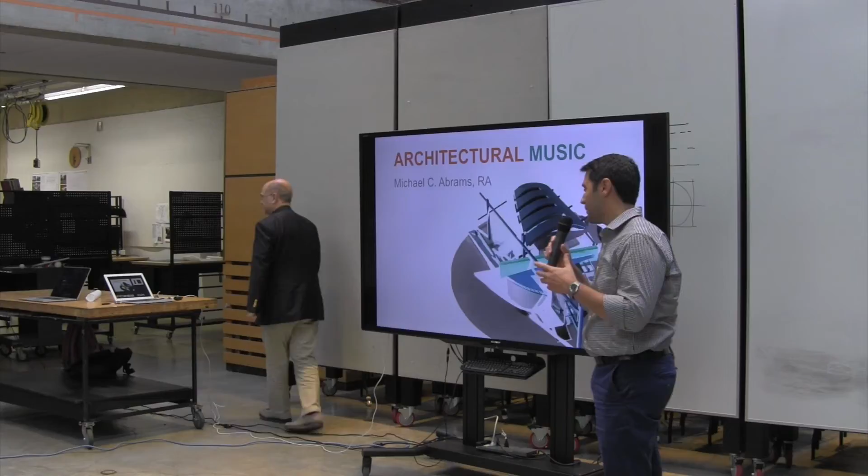I teach Architecture 400. I'm going to give you today's PowerPoint presentation, mostly on my design process, how I design, and how I relate a lot of my architecture to music. I love music, I like to play music, and I found both have their own language - one is auditive, and the other is visual, the architectural one.

One thing I always like to do is look at the similarities between architecture and music. It all started when I was an undergrad at the University of Puerto Rico. My teacher gave me a project that was to be the place for your hobby. So what I decided to do is create a space in which to play guitar, which is the instrument I play, and the concept was to reinterpret the components that create the guitar.

So I started looking at poetry and philosophers, and I found this great quote by Goethe that talks about petrified music - I call architecture petrified music. Really, there's something in this, the tone of mind. And this whole quote got me thinking about how I can start to relate architecture and music.

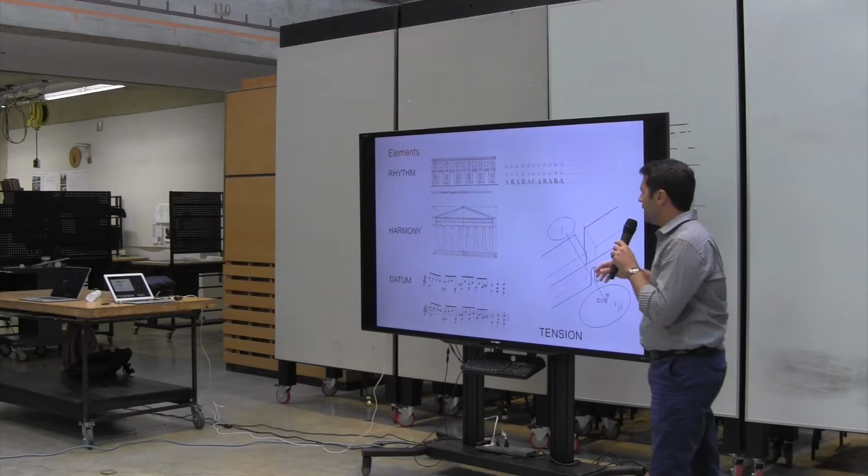I looked at some elements that are very similar, like rhythm, harmony, datum, tension, and with those four basic elements I could start seeing how to relate and make something intangible become tangible in architecture. So I created this series of diagrams, kind of what my students are doing right now in 400, looking at rhythm, tension, datum, and that helped me create this pavilion - this guitar pavilion.

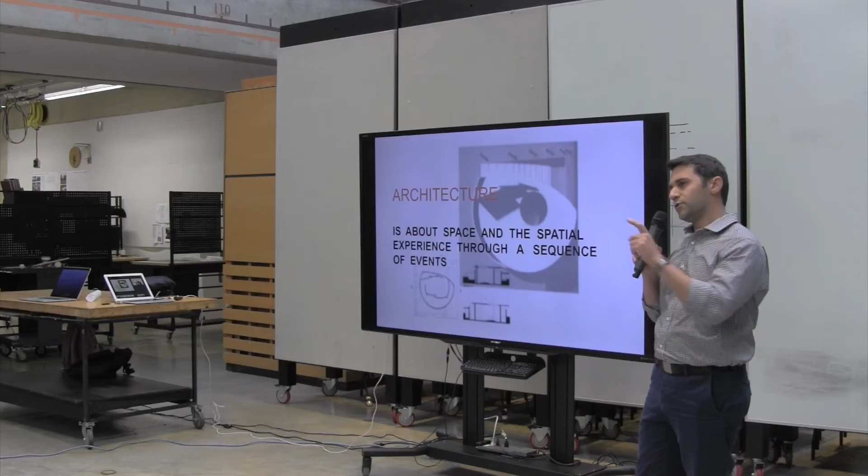That became an important lesson because it helped me understand what architecture is and how I define it for myself. To this day, architecture is about space and the spatial experience through a sequence of events. So this project, the whole process of looking into music, understanding it, making something intangible tangible, helped me reach this description that I still use today.

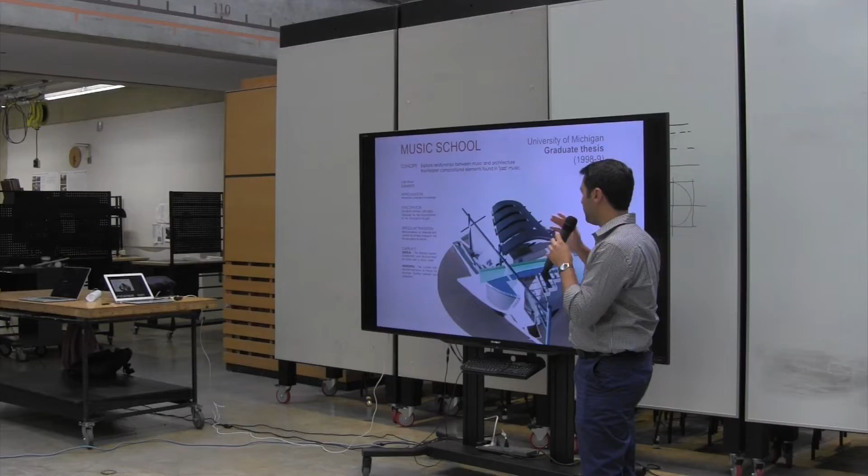I was able to experiment even further at the University of Michigan when I did my graduate thesis back in 1998, 1999. I started looking at other elements, in particular jazz music. Jazz is a bit different than regular music - it has more improvisation and offbeat rhythm, syncopation. So I was able to explore a bit more into other realms of music and then incorporate them into architecture. Here's a few more diagrams I did for that particular project.

This is a music school in which I incorporated this offbeat rhythm into the main auditorium and the classrooms, so it's all based around the theme and the work of music. Now, it's only two slides, but it took a whole year to work on this, and it's one of my favorite projects ever.

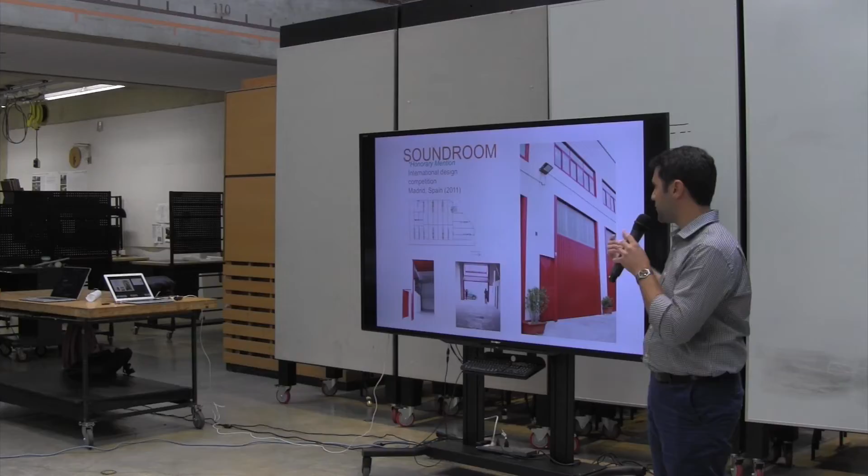Now, in real life, in practice, I was able to incorporate that as well in this competition called the Soundroom. This is in Madrid, Spain, in 2011. They wanted to hire an architect to design a space for young musicians in Madrid to play their instruments. Right now they're renting all these storage spaces, so they wanted to create a soundproof space. So I started looking at wavelength.

How do you take a simple wavelength that doesn't have a dimension, only one dimension, and transform that into a habitable space, in which eventually will become the rehearsal spaces. I also went back to that first project when I was in Puerto Rico to look at elements of rhythm, datum, tension, to help me incorporate everything I've learned so far into this piece of work.

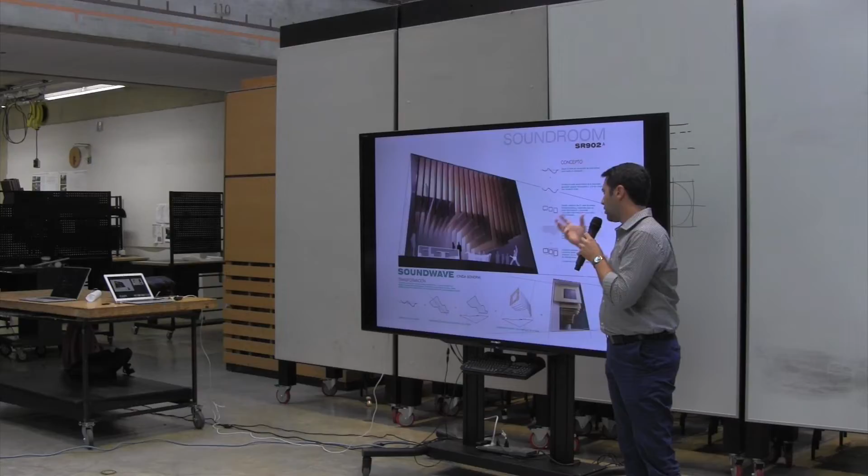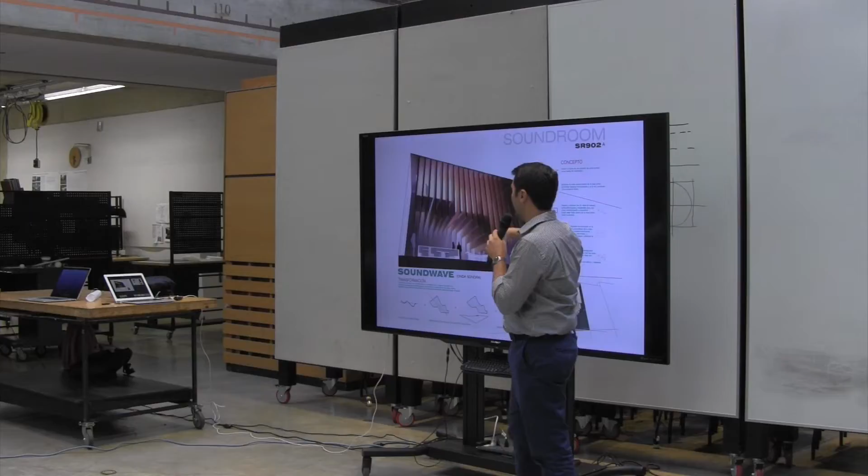This type of project was an enclosed element or shell, so we could only work the interior out. So I decided to take this habitable sound wave and create it with wood panels, the structural system that will support the three rehearsal spaces. That allowed an interplay of light throughout the day, so the rhythm of light was shown from morning to noon - so you can reflect music through light, and that's one of the things I really enjoyed about this particular project.

It got honorary mention, didn't go all the way, but I was very proud of it. We had to do a budget regarding the acoustics and the paneling system. It was truly a labor of love.

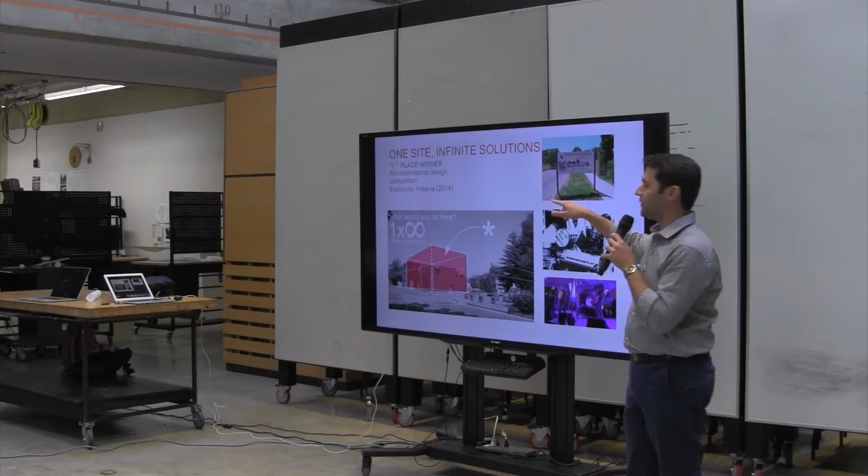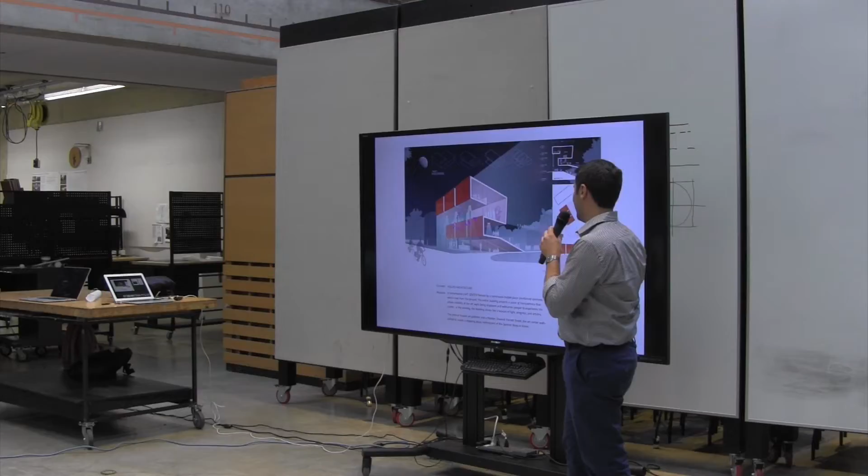Then 2 years ago, I did another one called One Site Infinite Solutions in Evansville, Indiana. For this one, I actually won, so I was very happy. It was this site in a rough neighborhood in Evansville, and they wanted a space for young musicians to play and artists to collaborate. So I created this art center, expressed as a folded piece of architecture that grows from the ground, like ashes, like the phoenix. At night, I based it heavily on the Spanish Steps in Rome, so you could still use it at night when the building was closed.

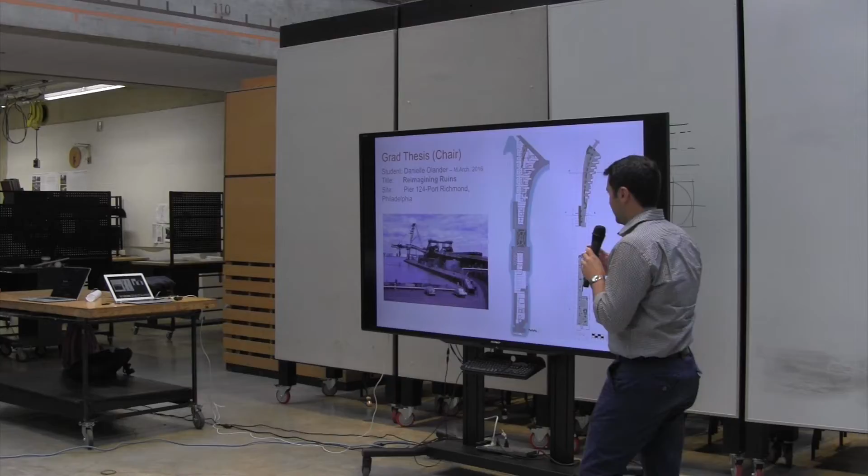Last year, I had the honor to be the chair for 2 students. One of them was Danielle Olander. I wanted to show the work we did together in that thesis. She looked at a pier in Port Richmond, Philadelphia, and here are the final plans. She took an abandoned building, and she and I were able to collaborate greatly, because this shared relationship almost becomes like a parent - you feel for them, you suffer for them, you almost cry for them, but you enjoy the moment. She took this really rundown building and turned it into something positive and beautiful for the community of Richmond - a civic community center for artists and young artists to come and play. So, thank you so much.

Michael, I forgot that you were a musician, and I just want to know if the PechaKucha song is up to scratch for you. Sure. Okay, next year.

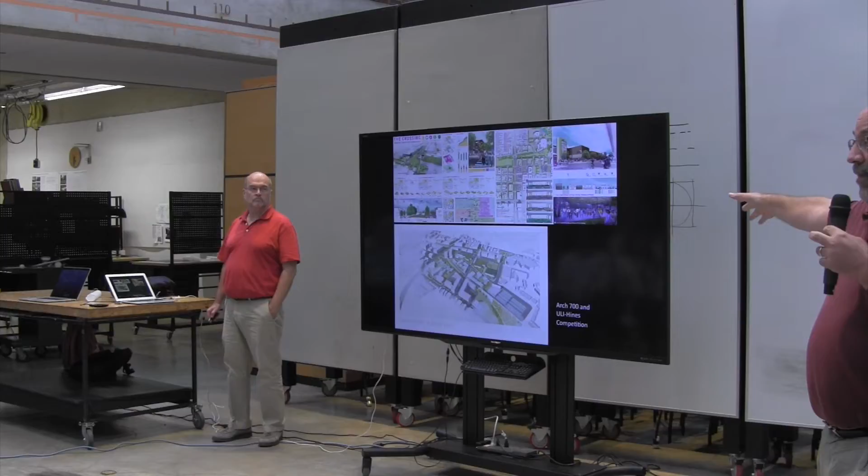This is Frederick, Maryland, in and around the area. You folks have an enormous amount of energy and insight and passion, and the thinking you bring to these kinds of projects is extraordinary. The people in Frederick were blown away by what our students came up with, and it gave them a way of looking at their city that they couldn't easily get themselves. It's an outsider's view, but a very sophisticated view. Even if they don't implement everything we came up with, just the way of seeing it was extraordinarily important to them. So if you can have that kind of experience while you're here at Maryland, you should try and do so.

These are some of the images. This is a Philadelphia project we did. We got some nice prizes for this in studio, looking at the waterfront.

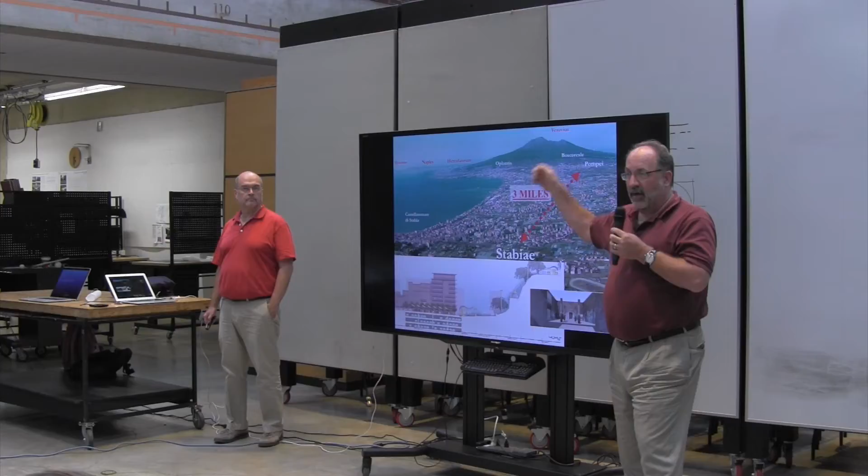This was all started, by the way, with a University of Maryland master's degree student. So millions of dollars of resources have been brought to bear to record, analyze, understand this site, and it all started with a master's degree thesis project, which sort of mushroomed into a great undertaking. The sort of things you guys do and are interested in can have incredible repercussions. This brought this site back to the world, because everybody had forgotten about it. It's the site right near Pompeii, the largest collection of Republican-era Roman villas in the world, and they're really fantastic to study and document.

Professionally, these are four people that I worked for and learned a lot from early in my career. Shalom Baranes, one of the best sort of businessmen architects you'll find.

Did a number of projects early in my career with Andrés Duany. Andrés Duany is one of the smartest people I have ever met, and anything he says about architecture and urban design, you really should think about, because he's very insightful. John Torti knows more about housing and running an architecture practice than anybody I've ever met. And Stan Eckstut, my partner with EEK, now Perkins Eastman, where I practice, is one of the most original thinkers in terms of urban design and architecture at the scale of the city.

A number of projects I've done early in my career: buildings with Shalom Baranes Associates, which were office buildings, and with John Torti, a big project in Turkey that was actually built, which was kind of amazing on this hillside. People in other parts of the world will put buildings in places Americans never would. This was all on 15% slopes and things, and it made for some tremendous sections in the buildings and in the urban fabric.

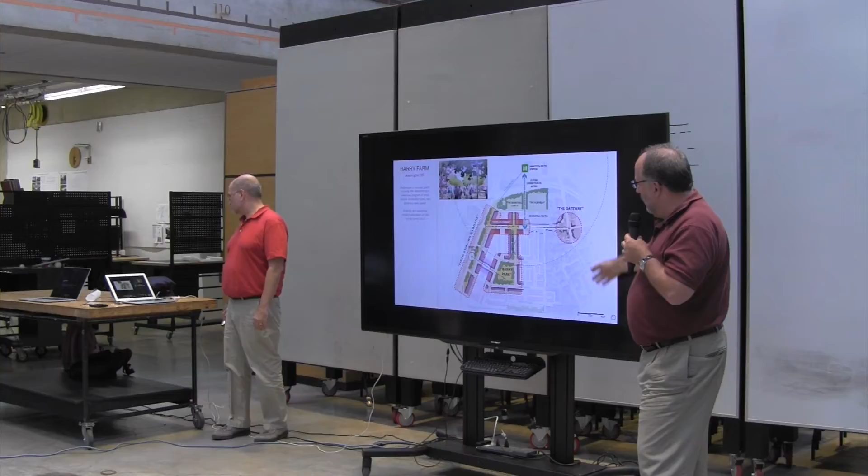Brookland Manor, a project on Rhode Island Avenue that will start construction next year. Barry Farm, another big urban design project in Southeast Washington. Some buildings I've done: a community center in Northeast Washington and Dunbar High School, and we make these kind of urban design drawings to show how the parts of the building relate to the context around them. It's really important when you get down to the scale of the building to show how it relates to the city. A project I've been working on for years, the McMillan Project on North Capitol Street, which will be rebuilding a historic landmark site that involves many different things.

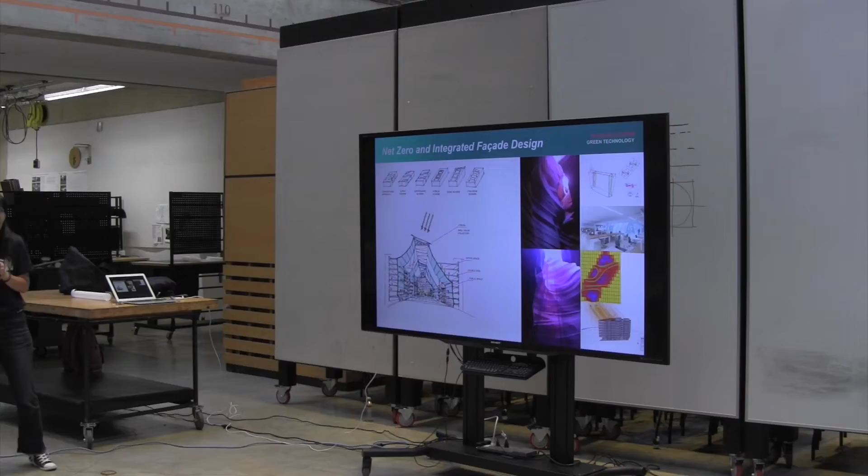Another interesting aspect of this building is the atrium design. The inspiration is from nature—see the Antelope Canyons, which not only have an amazing, fascinating form and texture, but also a fantastic daylight system. So we got inspiration from nature and tried to recreate that natural phenomenon in our building.

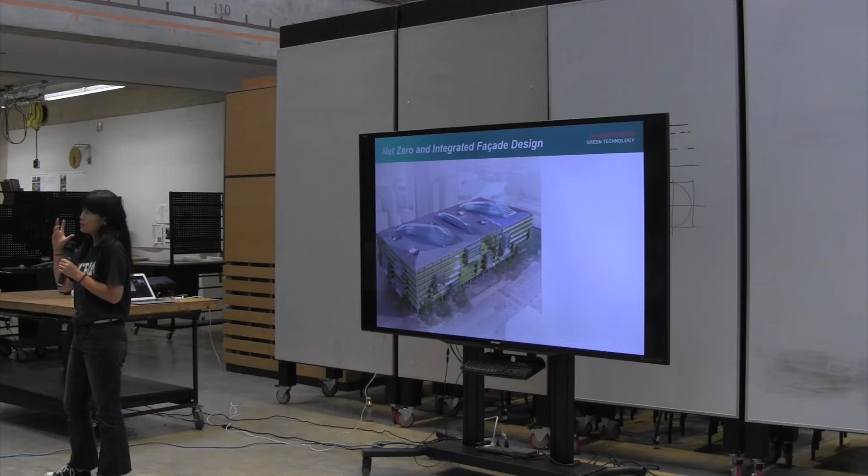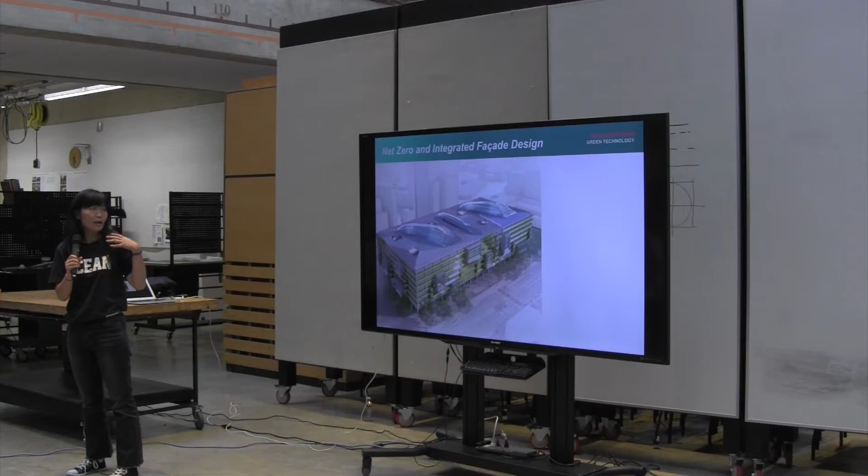Basically, by manipulating the geometry of the atrium, we tried to maximize daylight while at the same time minimizing solar heat gain. This is an overview—not a great picture, but it gives you a sense of the entire design proposal.

This project is located in a harsh climate, Abu Dhabi, and the client asked us to provide a fully glazed facade, which is not a great idea. So we used smart facade and smart glazing, which can provide self shade to itself.

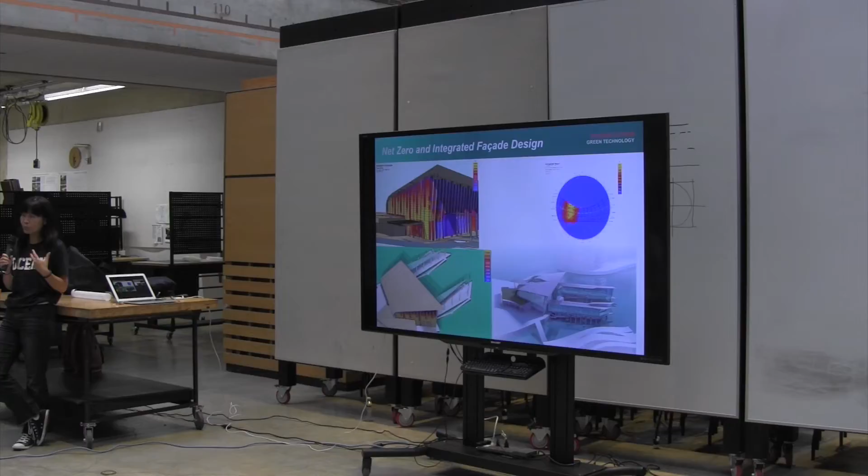This is another project in Doha, Qatar, another harsh climate. This time we took lessons learned from traditional, vernacular buildings. Instead of a glazed facade, we used natural local stone and focused on designing the best punch window.

We studied a lot of the geometry of the punch window as well as the material and different glazing types. Through simulation and iteration, we probably did 50 iterations in 3 days just to compare different design options. Here it shows the particular geometry of this punch window—it's not a regular punch window.

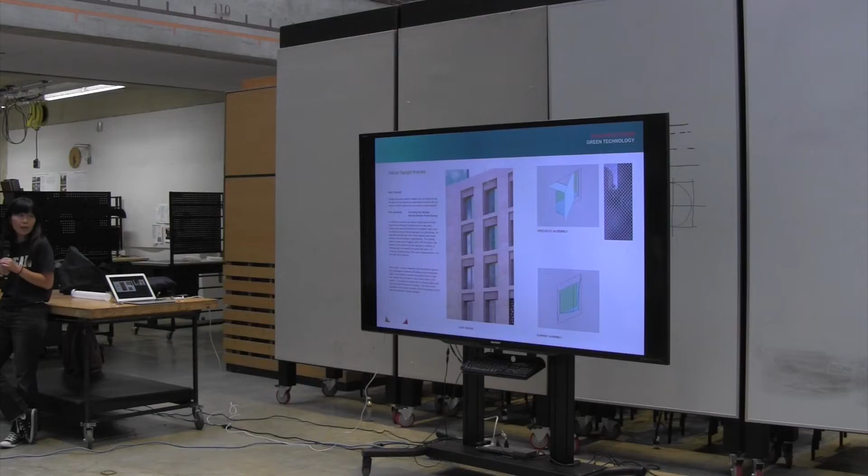We also did a lot of study on different frit patterns and techniques for how to integrate the frit inside the glazing. We do this almost like a second nature of the design process, from the conceptual design stage all the way to design development, basically comparing design options.

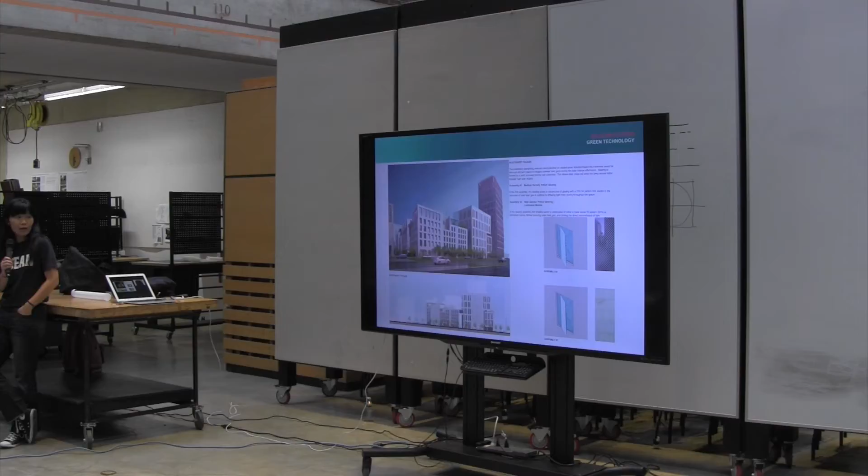I think green technology, meaning smart technology, can help you reach the optimized decision or design solution in a short period of time. Here it shows the different studies of the sun shade.

The last one is a particular area I've developed interest in over the past couple of years: life cycle analysis and adaptive reuse. For me, it's a natural progression because I'm always interested in quantitative, high-performance design and smart materials. That leads me to think about the entire life cycle of a building.

Not only how much energy the building will consume during the operational stage, but also how much energy the building will consume from day one—when raw materials are dug out from the ground—to the last day, when components are put back into the earth, to our planet. I believe that will be the future trend of architecture design and research. Not only do we focus on the building we live in right now, but also before and after.

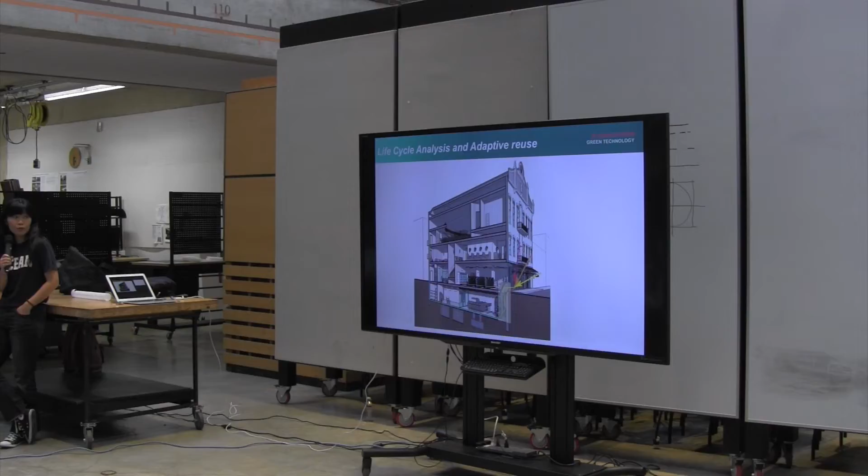This is a project my student did. They provided the adaptive reuse proposal, and at the same time I did the life cycle analysis of three different options.

Again, I think the future of architecture as a profession is going to expand beyond just design. As the former speaker said, we do a lot of design thinking as well, and we do quantitative research as well. Thank you.

I would have thought you probably had done many of these before—it sounded just like you had.

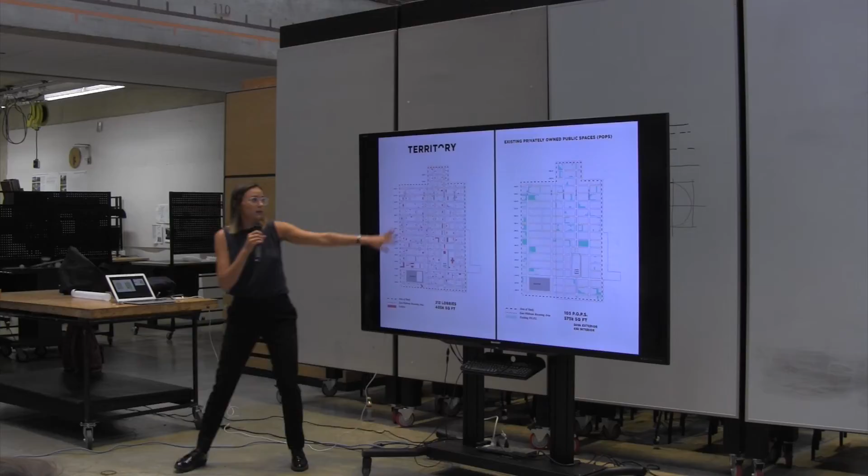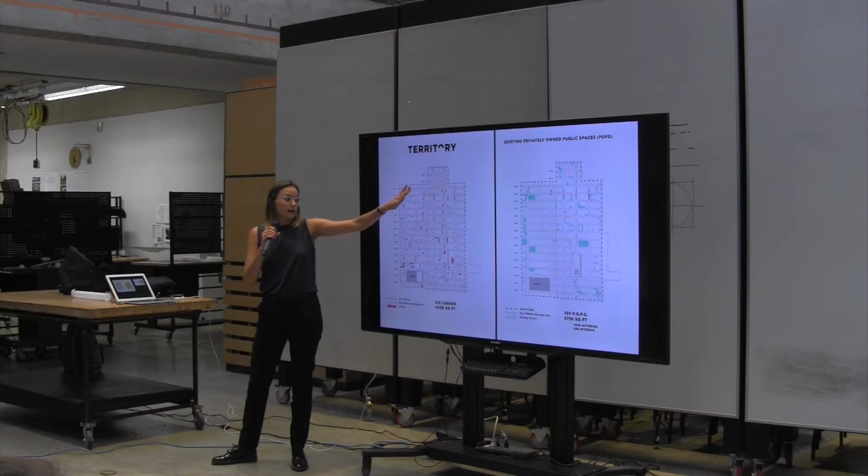I looked at East Midtown Manhattan, a downtown corporate area, and looked at all these totally empty, horribly used lobby spaces. I actually walked around and mapped them all out. This is the neighborhood—the city was looking at rezoning it anyway, so I had this momentum to work with. This shows how much of the city is on the ground floor, right next to the sidewalk, but blocked off and not used.

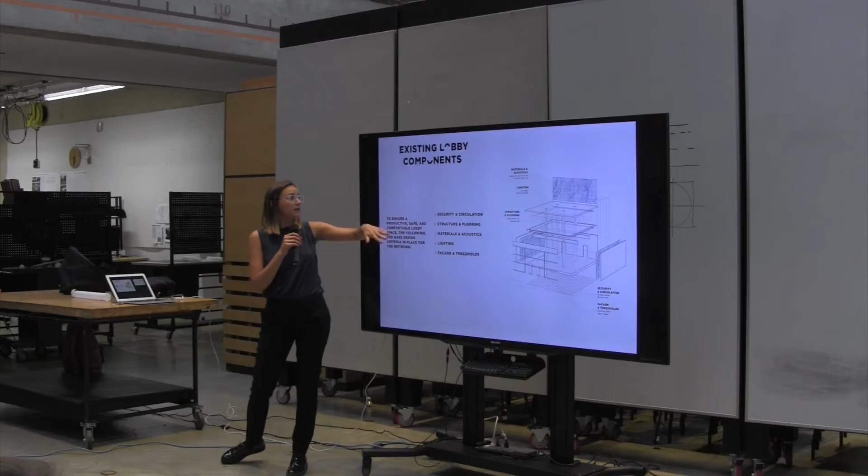The other map was a precedent of privately owned public spaces, looking at how the city is already knitting together public and private space—that's the big context. In the immediate context, this is the lobby. It's excessively designed in every way; the structure within the scale of the lobby is overly robust. Electricity, facade materials, all these things are already integrated in the lobby, and I looked at how architecture could rethink that with the materials that are there, intervening to make public space and a public network of lobbies through public-private partnerships, leveraging private interest in the city for public space.

This is an example I did in the Seagram building, looking at manipulating the facade, making mezzanines off the structure, and looking at how to consolidate circulation in this large space—not even the largest lobby in East Midtown—how the bottom of the Seagram building can really take that plaza that's there and bring it back in.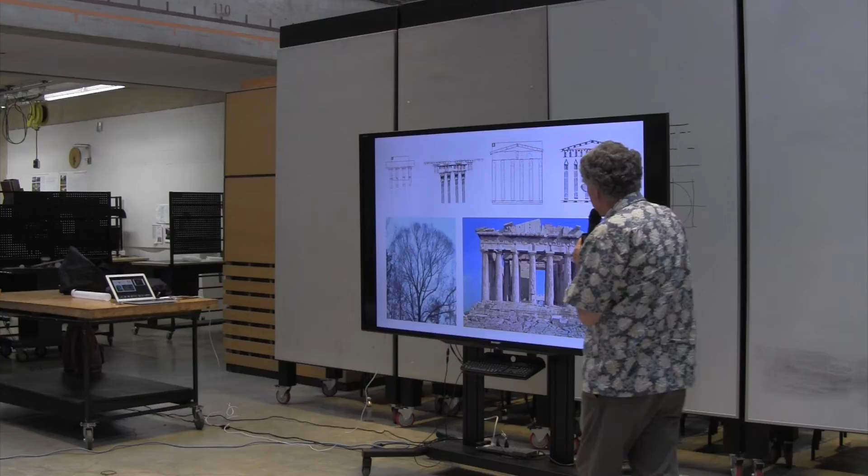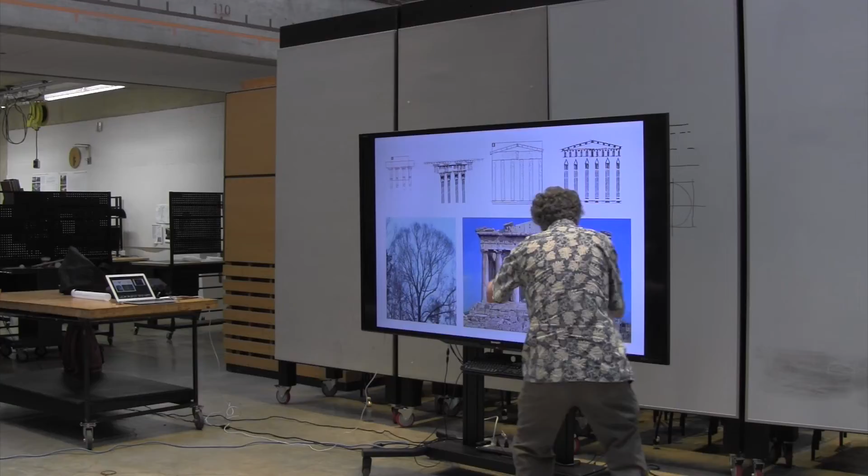If you go in close, it even has bark. If you look at a Greek temple, a Doric temple, and do a fractal analysis of it, it's clear that the triglyphs are little small images of the whole temple. And actually the columns, if you squeeze it this way, are also images of the whole temple.

This is a tree turned upside down compared to a drainage pattern for a river, and you can see the same kind of shapes. Nature all over is self-similar and repeats itself. I'm going to go back—sorry, I went too fast.

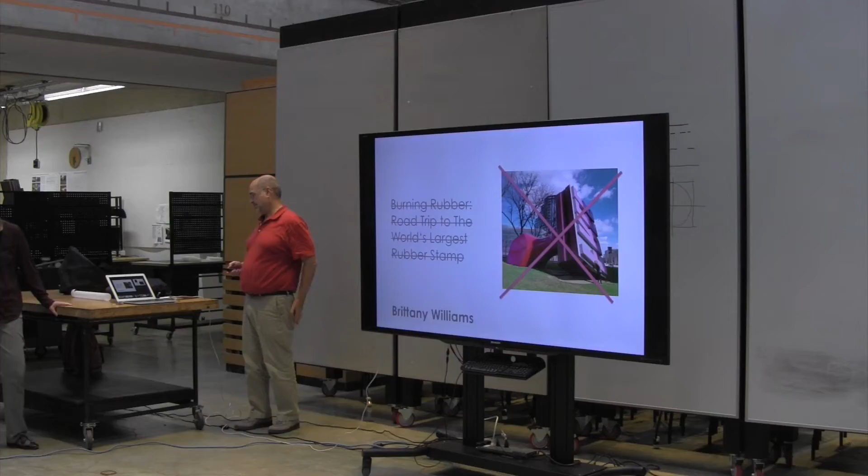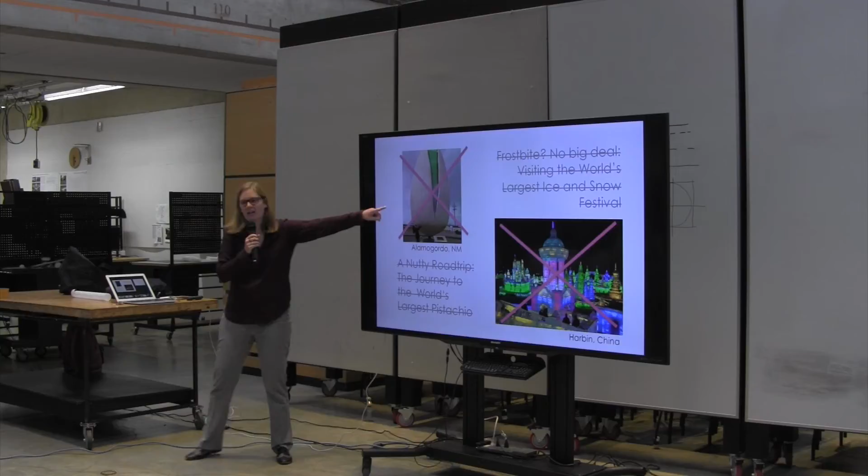So I'm not going to talk about burning rubber, the road trip to the world's largest rubber stamp. I know you might be disappointed. I'm also not going to talk about my trip to the world's largest pistachio nut in New Mexico, or when I got frostbite in China at the world's largest ice festival. All of the locals laughed at me. And by the way, this isn't edible, so don't go there. It's not worth it.

But I am going to talk about how we as people are the sum of our parts, and how our experiences shape us as designers. Everything that you do shapes you as a designer. Lots of times we orchestrate these kinds of events, like your thesis, like going to college. But a lot of the time these things just happen to you. Still, you can orchestrate events that will increase this.

So you go to an art exhibit, you see a piece of artwork, it changes your life. For me, traveling is the biggest thing that helps me unlock these doors, and I can really feel the way my worldview is shaped through traveling. So I try to set up as many experiences as possible to invite that kind of experience. Traveling is particularly important to me.

My partner is a commercial airline pilot, so her career kind of unlocks doors for me. I can show up at the airport and get on the plane like it's a bus. That really enables me to take advantage of this and travel as much as possible so I can provide myself with as many opportunities to change my worldview.

When I'm traveling, I'm really interested in dwelling and how we dwell. In professional practice, I'm really interested in craft, context, and environmental response. That's something I'm looking for when I'm traveling. I really want to find the ways that other cultures and other people combine these things together to create a contextual response.

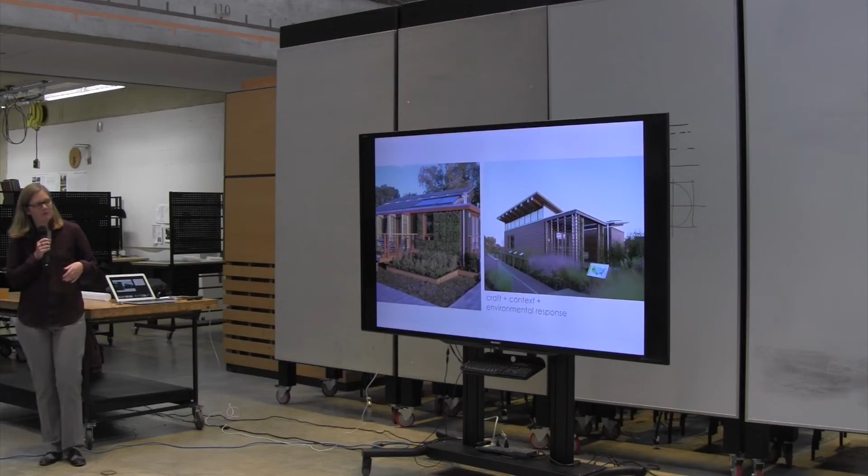In academics, you guys probably know these projects. As a graduate student, I worked on Leaf House, and I was one of the faculty advisors for Watershed, so it's the same kind of ideas. The reason I'm so interested in how we dwell is that it's a simple thing, shelter. It's a universal need we've had for thousands of years, but there's such a diversity of solutions, and so many things that impact those: economics, culture, climate, water access, and you name it.

Traveling to precedents, people have said this before, the need to go and experience places and understand the scale and the context and the smell of the place. So going to famous dwellings to really understand them and their place in the world.

I'm also interested in the vernacular. I was in Zambia in Africa this past summer, and I became obsessed with the sort of primitive hut, using local materials found nearby. The reason why they were creating these kinds of housing types was really, really fascinating to me. And they were all over the place.

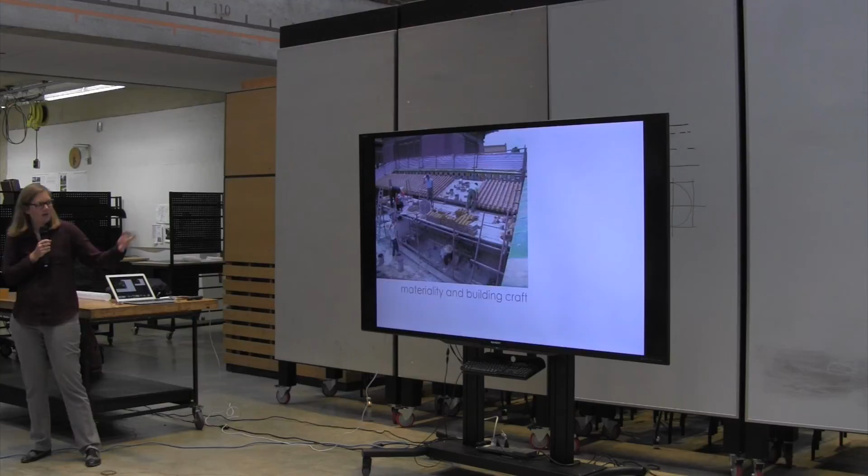I'm also interested in materiality and building craft. Building with tile here in China is actually kind of cheap, and the masons and builders know how to build with a tile roof. But if you try to do that in the United States, it's very expensive - no one knows how to do it.

So I'm trying to figure out why materials are of their place. And I'm not just interested in the famous stuff. The vernacular is also interesting, and so is what's happening now. So I went around in Beijing taking photos of different colored housing. They just had the same apartment building, but it was painted different colors all over the place.

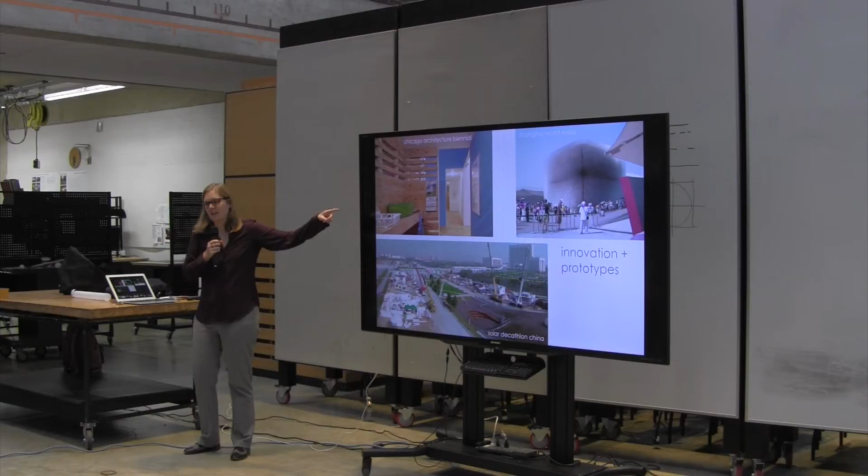But there's something to be learned from those efficiencies. I also think there's a lot to be learned from traveling to places and seeing innovations and prototyping. I was at the Chicago Architecture Biennial this past winter, and this is an affordable housing strategy where they took pallets and put them together to make sustainable housing.

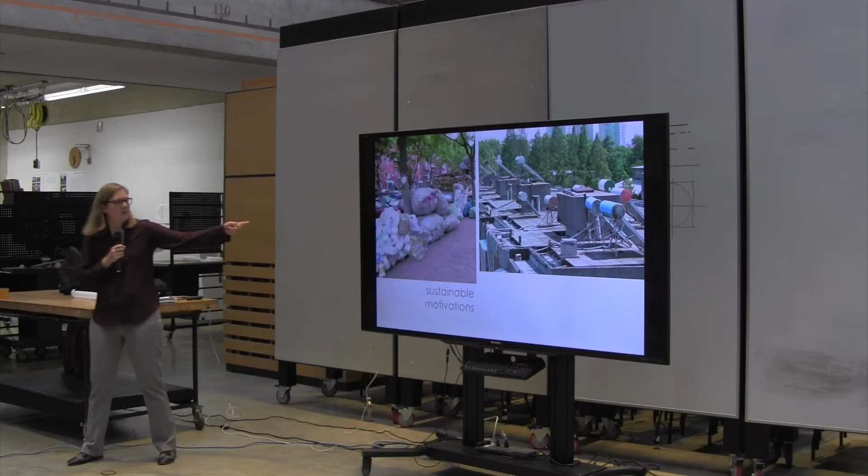I'm also interested in sustainable motivations. When you go to lots of European countries, South America, you see everyone has solar thermal, and it's no big deal, that's the standard thing. Then you come to the U.S., and that's something special. Or people recycle in other places because you have to recycle.

So I take all of those things as both direct and indirect influences, and they change my worldview in ways in which some of them I'm aware and some I'm not, but it all becomes part of my consciousness as I'm working as a professional and as an academic, and just as a person.

You can orchestrate events to change your life, to create life-changing experiences, but to me it's really the unexpected that has the biggest impact, to create these experiences where you might experience life-changing events, taking advantage of those opportunities.

So you might say, there's so much to be learned from the everyday world around you. Say yes to those new and diverse experiences. Go to the lecture, you might hear a quote that will change your life. Go see an art installation. You don't need to travel across the world in order to have a life-changing experience.

And then once you're there, observe, observe, observe. All of this you're observing and taking in really is changing your worldview and helping you as a person.

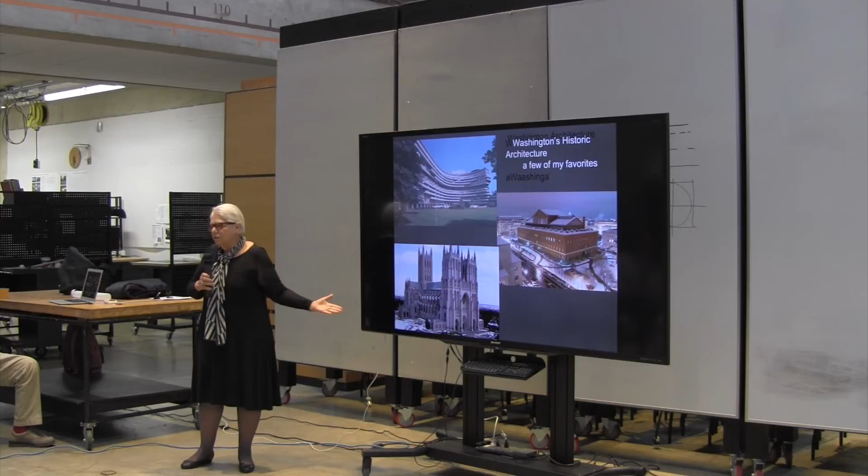Let me show you a few of my special subjects that I like, almost all architecture, but also city planning. I love the Watergate, that is really phenomenal, it's so Italian, and it's really underappreciated. The building museum is in a spectacular building, if you have not seen it, and the cathedral is something, it's just a building that talks to me. I would go in it and it just speaks.

I'm very interested in teamwork. I do my own scholarship, but I work in teams. These are two publications that resulted from that. Paris on the Potomac, I'm teaching a course now relating to that. I worked with Professor Gournay and another scholar on it, it's a collection of essays about French influence. Here you see some of the images that reflect my scholarship in the history of Washington.

I've really spent a lot of time on the planning of Washington, and I'm also interested in German influence in Washington. This is a spectacular building still with us, and this gentleman is a German architect and engineer on whom I've done a lot of work, and perhaps someday we'll do some more.

So museum architecture is a special area. I was for 20-some years the chair of the Smithsonian's Architectural History Department. My office was in there, and I wrote that book with a team of people that I got together and worked with on this. There are many museum buildings, but you would not think that I would have studied zoos, but I did, because the Smithsonian has a zoo, so I have a bit of a background in zoos and zoo architecture. Not a very long history.

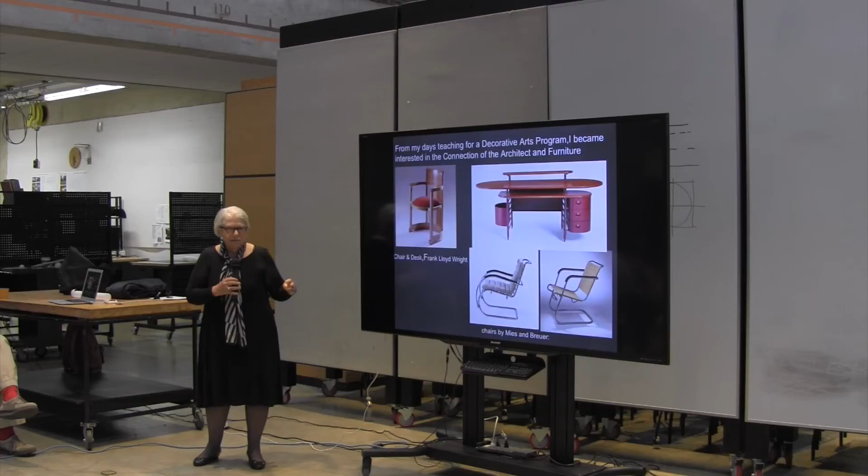I did teach in the decorative arts program early in my teaching career, and so I became interested in the relationship between architecture and furniture and the spaces. I think you may recognize some of these by Breuer, by Mies, and by Wright.

Right now, I am happy to be here at the university and have been here for 10 years teaching in the architectural history area. I was the architectural historian and preservation specialist for the Smithsonian. I'm a founding trustee of the National Building Museum, and I am very active still at the National Building Museum. It is a wonderful organization I'm proud to be associated with.

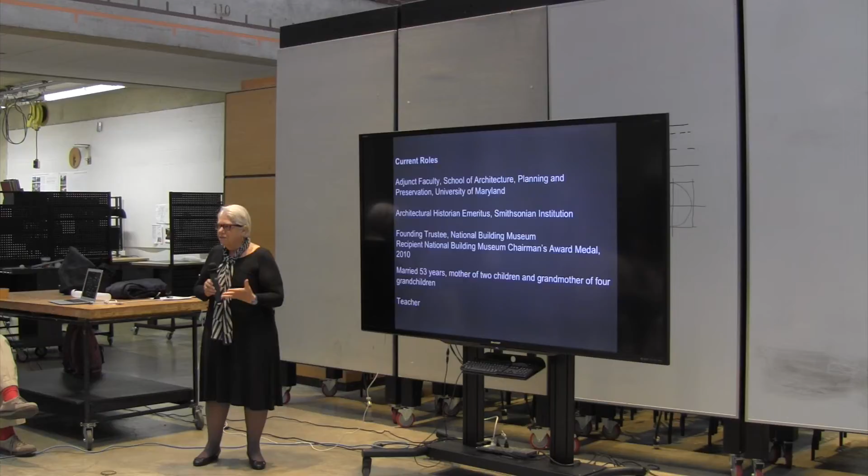I've had the blessing of being married 53 years and the support of a wonderful partner and the support of my children. These are the favorite things I do, and that's teaching.

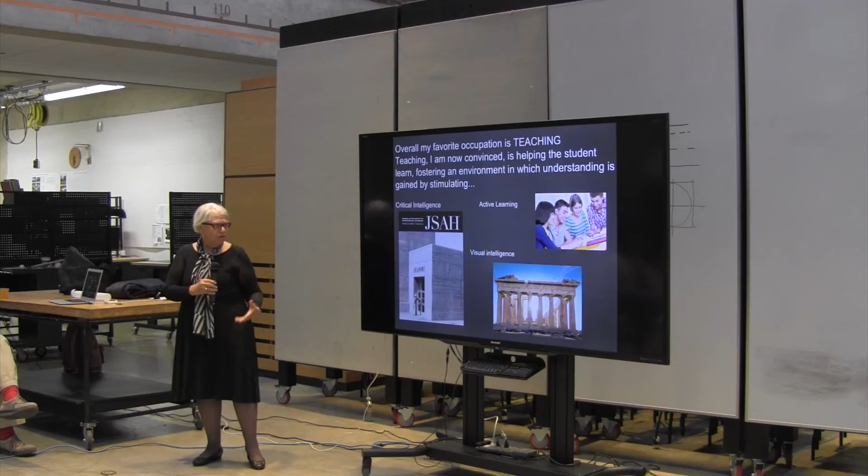I'm always teaching. I love the critical intelligence. How do we evaluate active learning so that the students get to really be involved? I'm experimenting with that. And of course, the visual intelligence to be able to take a form and understand it and describe it. Now I have one more slide, and this is what you can do for us.

Professor Gournay and I are doing a lecture in a series called Democracy Then and Now. Our lecture is going to be on the architecture of Thomas Jefferson and how certain of his buildings seem to express his ideas about a new democracy. So we're trying to show intellectual ideas and visual forms.

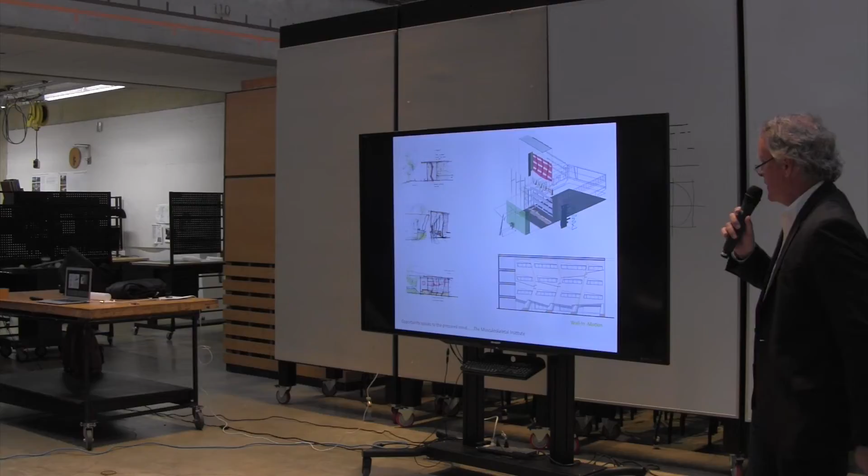Because of the themes I had unleashed in my intuitive work, I was prepared for this particular project, a musculoskeletal institute at the University of Connecticut, which involved themes of movement, motion, and spatial sequences and repetitions that I'd been examining in my drawings on an abstract level. Here are some conceptual sketches which resulted in a lobby space set in motion, about human movement through space. This is the lobby space where people were placed in an environment meant to transport them out of their daily routines. The building faces a wetland area and is essentially 60 by 120 feet of glass, which pulls back and reveals this wall, which appears to be moving.

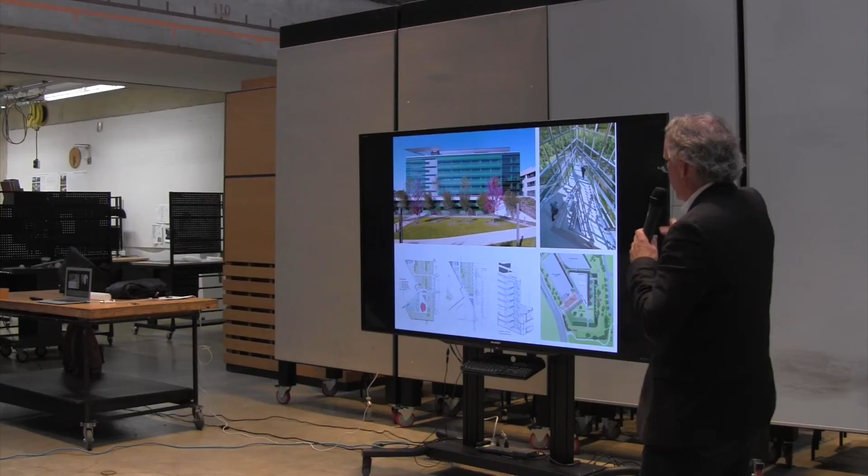Some other themes in larger projects I've done recently for the government. This is the National Guard Readiness Center in Arlington, Virginia. Again, these themes of serial composition, movement, motion, and spatial sequence informed the way this building was organized. Half of it is underground, defined by a transparent stairwell which links all the levels from below grade to above grade. This is a vertical sequence of forms, whereas some of the other projects were based on other compositional themes.

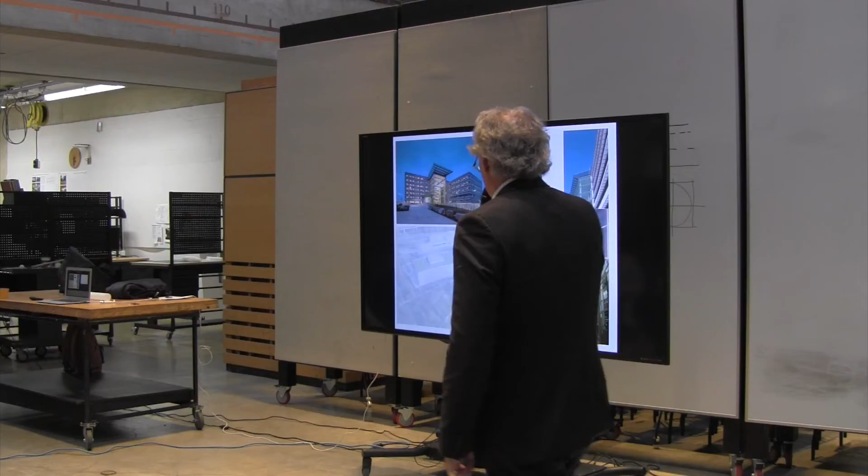Also, since we are in Washington, the National Gallery, when it was built in 1978, was a particular inspiration for me. This is a triangular building, and I was very interested in seeing what we could do with that formal language.

Another project for which we branded the design concept—this is for the Social Security Administration. The concept had to do with creating an arced, transparent space which we called the Arc of Light, a kind of double entendre: the Arc of Light, the Arc of Life, the Social Security Administration.

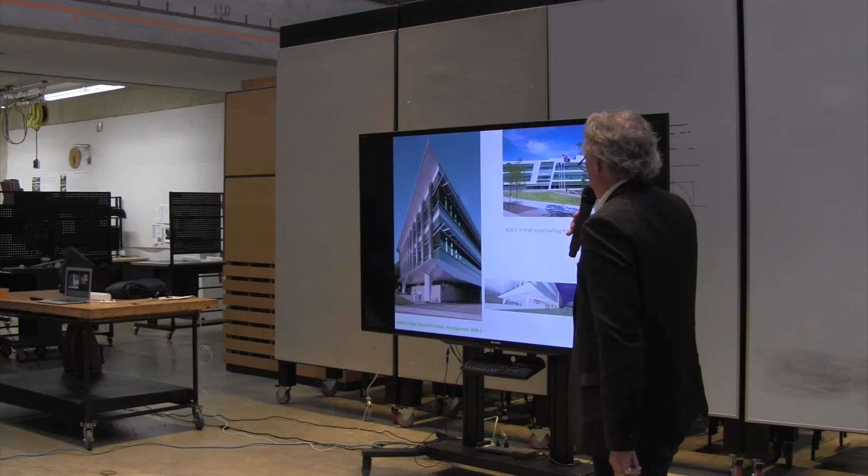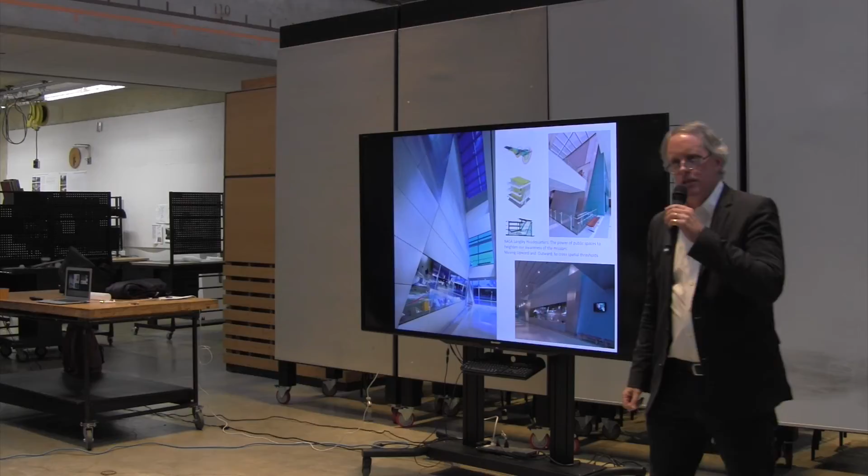When you present a design, you have an opportunity to establish your themes and the context you'll discuss with your clients. In this case, for NASA, I was fortunate to be the lead designer for several buildings there, the first being the headquarters building. Context, craft, and technology were elements of the design conversation we developed with this client. Public spaces are where many things come together in buildings, and in the case of NASA, this sense of movement and motion—moving upward, moving outward, crossing thresholds—are all themes in that NASA universe.

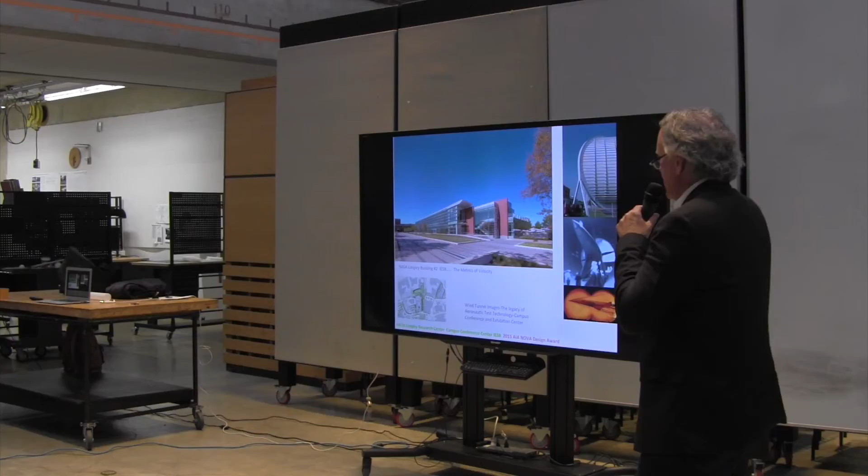The second building we did there was based on looking at some of the existing wind tunnel facilities and thinking about the metrics of velocity as an architectural proposition. This is a campus conferencing center right in the center of the campus, and it takes as its major point of departure some of the language of the existing wind tunnel facilities that define that campus. Then we brought those concepts down to the level of tactility, the level of architectural detail—what can we go and touch, what do we experience most directly?

Finally, some recent work in China, a Research and Development Campus. A couple of you will recognize this project—I won't point you out—but it was another opportunity, in both an urban and a natural setting, to think about the language of research in a very different context.

So it all comes back to drawing. We draw, we think, we create intuitive moments for ourselves that we analyze. This project is no different in terms of a design process. We're looking at the language of building from an intuitive perspective.

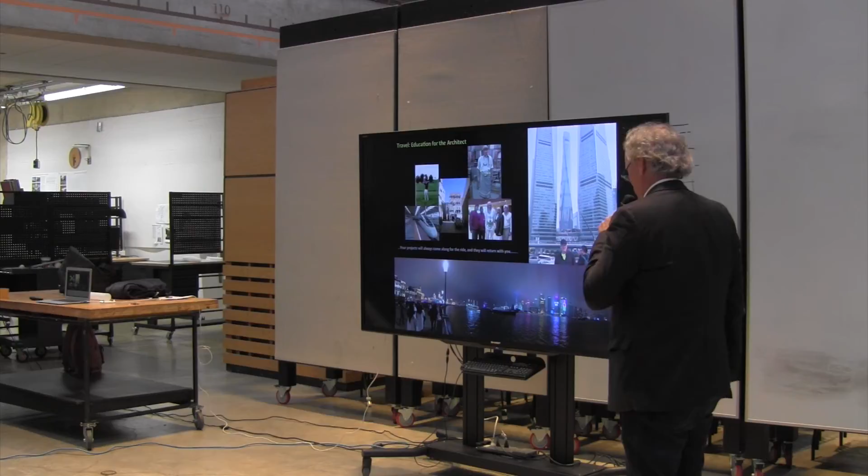Do travel—all of you thesis students, all of you architecture students, and all of us. It's very important to travel and to take your projects with you in your mind and expose them to different environments. So begin: what do you mean when you say, when you draw? How does it sound to hear yourself say this thing or that thing, or to articulate an idea here and in some other place? When you wake up in the morning, you begin to draw. I love the Steven Holl quote—things are clearer, and we begin with an intuitive moment of listening to ourselves and our inner voice. Thank you.

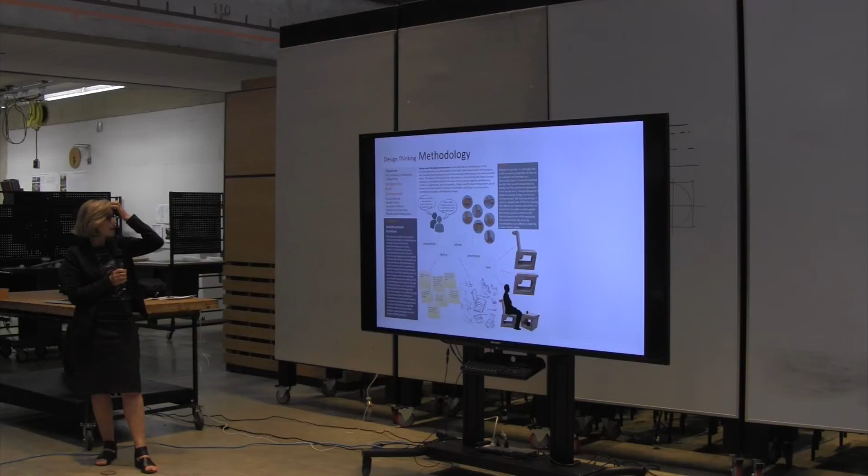She's got the diagram for her process, and this is the way she set out to do her design research. The first thing she did was find out who's going to use this designed product. She went out, met a bunch of people, observed them, immersed herself in their world, and engaged with those users.

Then, armed with that information, she defined the problem. She created an actionable problem statement. She articulated a specific, meaningful design challenge that she then took on and grappled with.

Once the problem was sufficiently defined, then it was time to ideate, and she generated alternative ways to address that design challenge. At this stage of the process, you cast the net wide to think about all the different possibilities. You don't begin to narrow down until you've really made your design space as wide as possible.

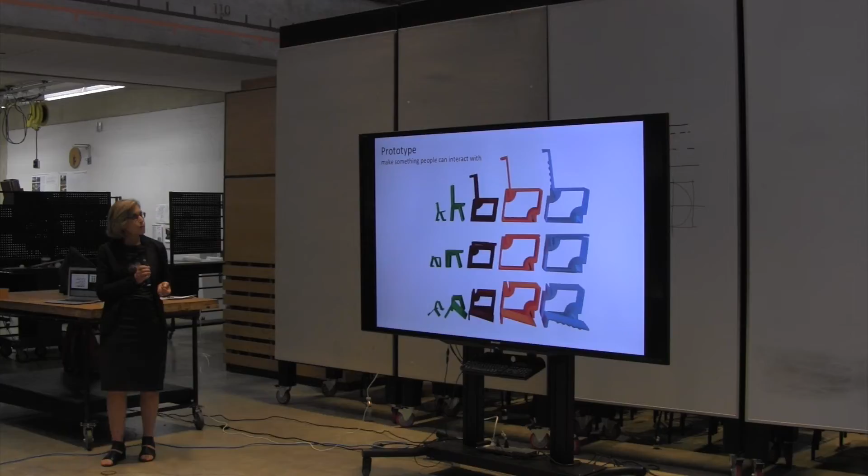Then you prototype, you make - for us, the thinking and making often is one and the same process, but you want to make something people can interact with because you want to get feedback. When you have a prototype you can hand to someone, show to someone, or even act out for someone, they can test it and you can receive feedback, both from hearing what they have to say about it, but also by watching the ways in which they interact with that prototype.

Once you get some feedback, then it's time to iterate. You learn from the feedback and you do it over again, addressing those areas where you know there's room for change, improvement, or just refinement. Then you test again. So you go through a loop where you are thinking, making, testing, getting feedback, learning, and doing it all over again. It's a vigorous process where you are continually making stuff - active. You're not sitting and thinking, but you're out there making, doing, showing, and listening.

So number 4 in that abstract, what will be the result of your design research? What are you going to create? Well, in this case, it was a chair. And in your case, it could be many, many things, depending on what you define as your actionable challenge.

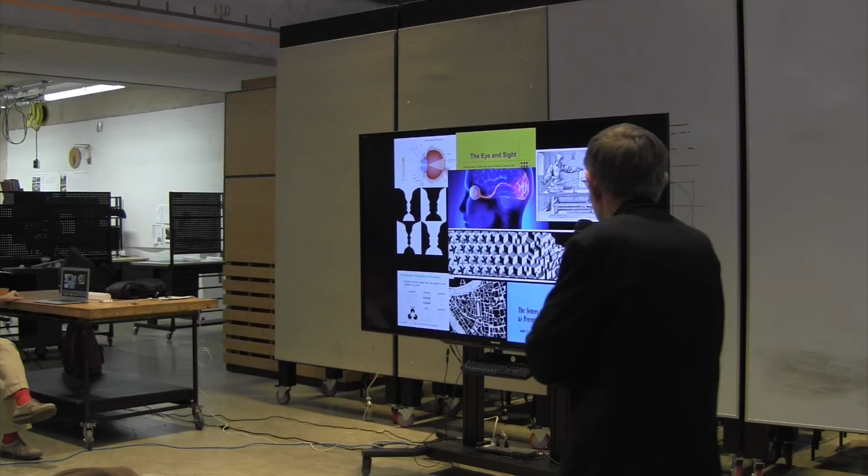I was very dutiful in studying all the great architects of early modern architecture, and the influences from art on their work, and made great efforts to go see this stuff. I'd look at a monument like the Schroeder House by Rietveld, then discover it's this teeny little building at the end of an otherwise very nice street, where all the other houses looked a whole lot better. Or as much as I appreciate Le Corbusier, when I got to Chandigarh, it's a really crappy city, and he was largely responsible for it. Or Mies van der Rohe—as much as I love his work, when I go to Chicago and see what he did with the Federal Center, not so great.

And then along comes somebody like Robert Venturi, along with some other folks, challenging all the fundamental presumptions of all this stuff with his book Complexity and Contradiction in Architecture, and his cute little house for his mother, which does not have a flat roof, actually has a facade composed in a manneristic fashion, with a clearly symbolic fireplace expressed on it, and so on.

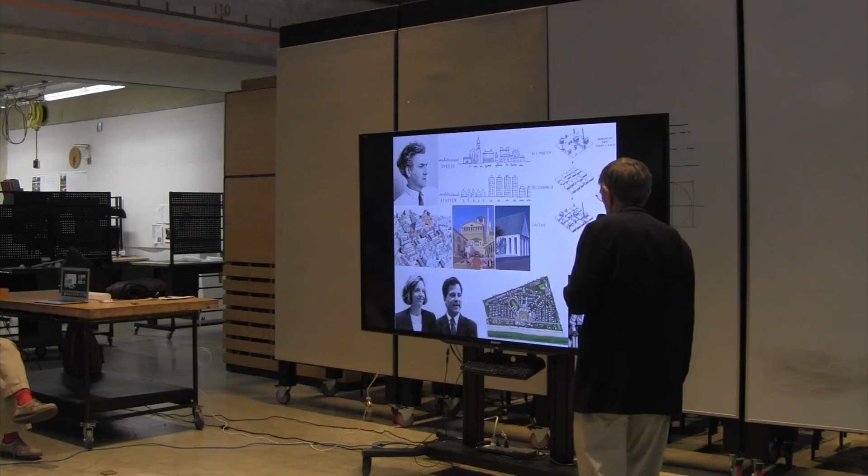Matt Bell mentioned Andres Duany. We should also mention his wife, Liz Plater-Zyberk, DPZ, who did the project for Seaside. The innovative thing about Seaside was that while they could have done all the buildings, instead they did the regulating plan and made a set of rules that would govern the architecture, and had any number of other architects come in and design the buildings—making it a much more cohesive and interesting environment, as they readily said, than if they'd designed all the buildings themselves. Inevitably, they would have looked too much alike.

That, and a project in New York City—Battery Park City—which also did the same thing, basically dealing with the idea of extending the existing patterns of the city. Those groups of people came together and created the Congress for the New Urbanism, which, beginning in roughly 1990, has really gone about attacking all these different problems endemic in the destruction of our cities, challenging any number of those notions at many levels. There are still two of us here on the faculty, myself and Matt Bell, who are founding members of the CNU. Ralph Bennett was a founding member as well.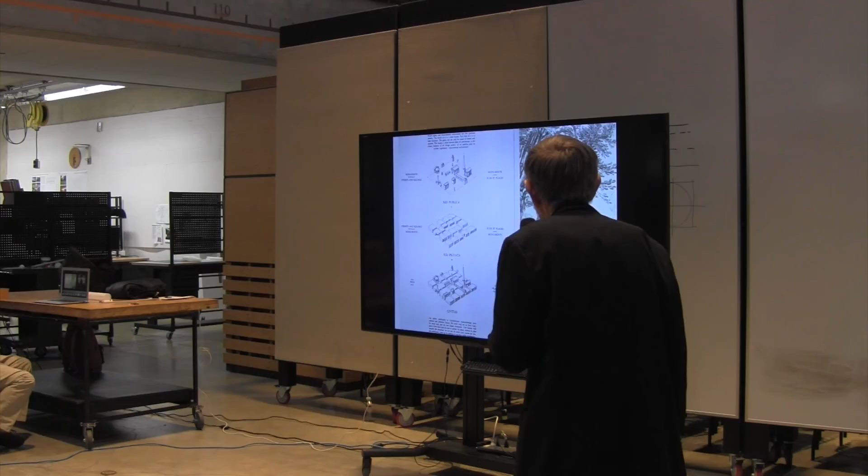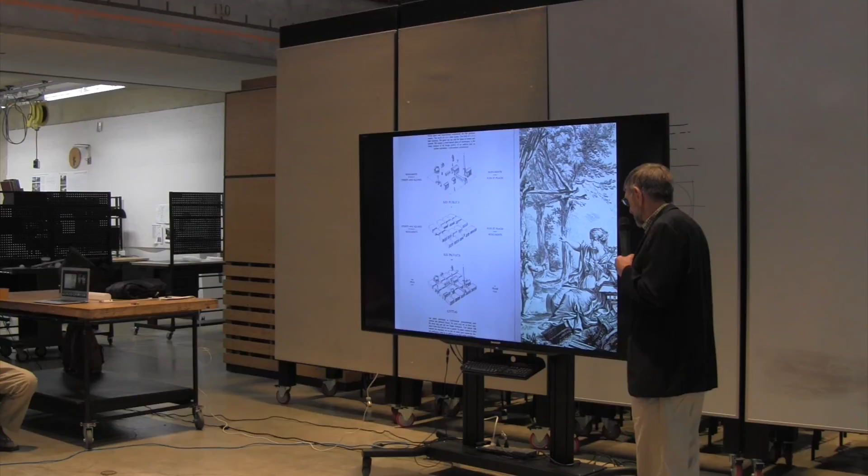So what does it turn out? It turns out that the relationship between architecture and the city is really complicated. It's a vast area you can enter into and study, if that's your interest, trying to get it right. It includes all this stuff about our society, a whole bunch about the city, of which there's increasing literature, and at the same time it doesn't leave out architecture—there's a broad set of ideas we can connect with, having to do with informing how we make architectural space. All of which, similar to that first slide Matt Bell showed, was the idea of the primitive hut at one end, the city at the other. As I was putting this together, it struck me that maybe our patron saint of architecture is not only pointing at the primitive hut, but pointing beyond it to the city, suggesting we should pay attention to what that relationship is.

Thank you, Professor Hart.

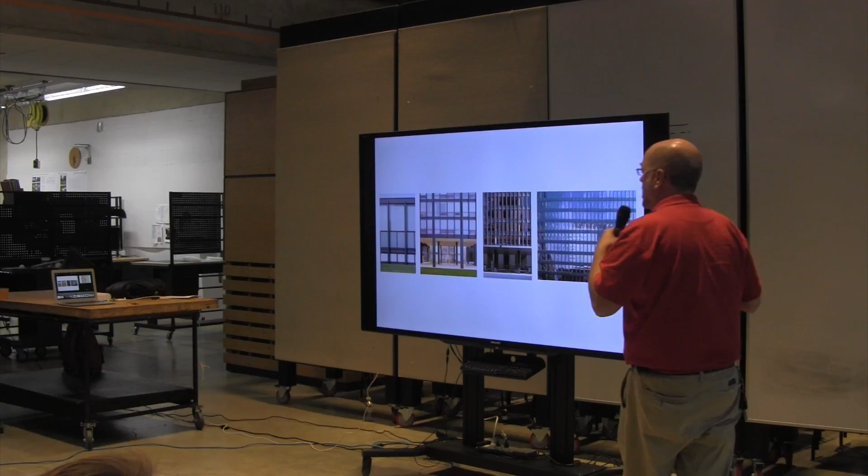And I'm not being critical of this. I love this. I'm waiting - I was thinking about waiting in line this morning for the new iPhone, but thought better of it. But if you think about it for a second, when you go to see your doctor, when you go to the lawyer, when you go to the architect, wherever you go today, work, everything, we're on a tack towards homogenization, where everything is the same. And it brings back to me the question about architecture. When architecture becomes the same, the response of architecture to just about every problem has the same answer, where does that leave us? Where might we go in response to that? And I think that in contrast to Mies - and again, as Professor Hurd said before, I love Mies incredibly.

I think it's important to study him. I think that in this diagram by Le Corbusier, these 4 types that he talks about is the seed of an idea. The idea of typology, of type, of formal type, of urban type, of functional type can be a form of resistance to the idea of homogeneity.

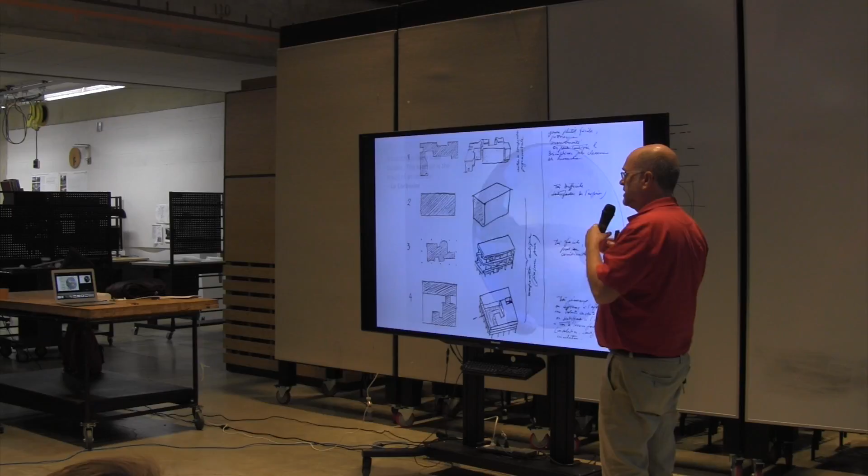Take, for example, this idea by Le Corbusier, that the building is like a soap bubble. The exterior is the result of the interior. Presumably the program forces itself onto the exterior to shape the soap bubble, to shape the building.

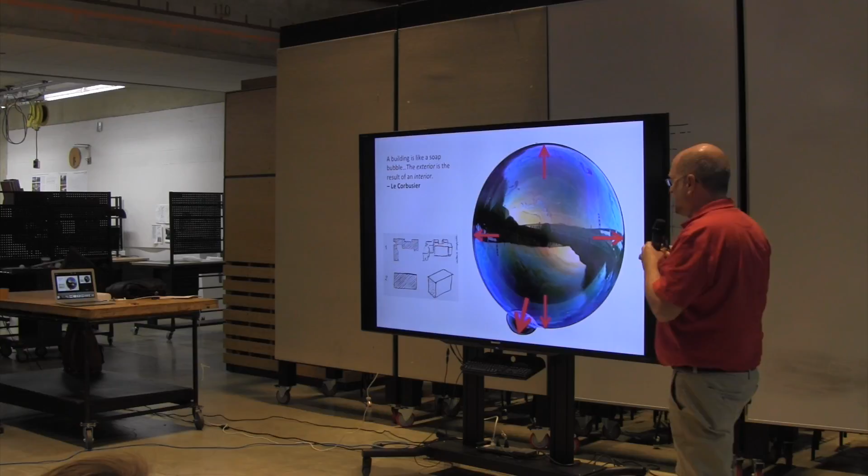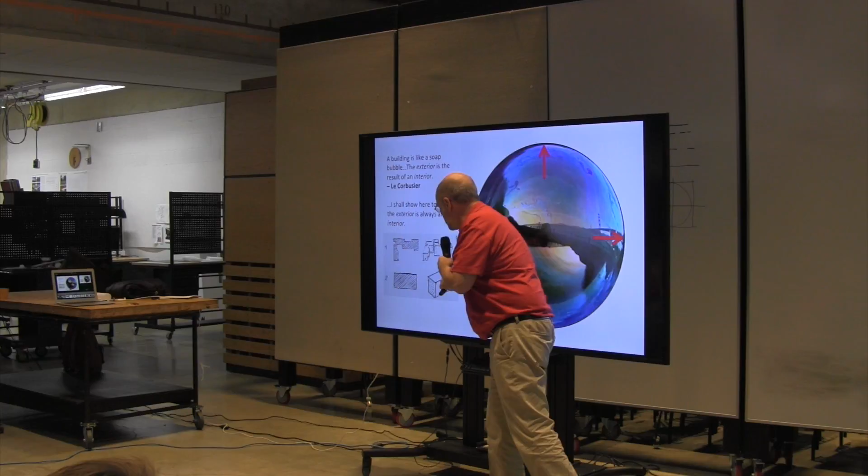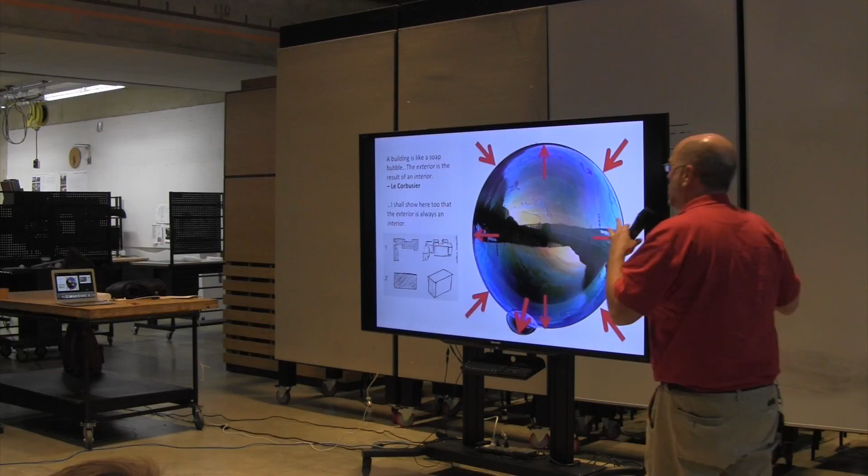I chose this bubble in particular with a little wart on it, because I'm really wondering whether when the bubble gets this sort of perfect perimeter and it's equally disposed, that's supposed to be the result, or whether that's the result in the case where the exterior forces are present, where the exterior is always an interior. That tells me the architecture actually happens on that thin line, the interface between the demands of the city and the demands of the program of the building.

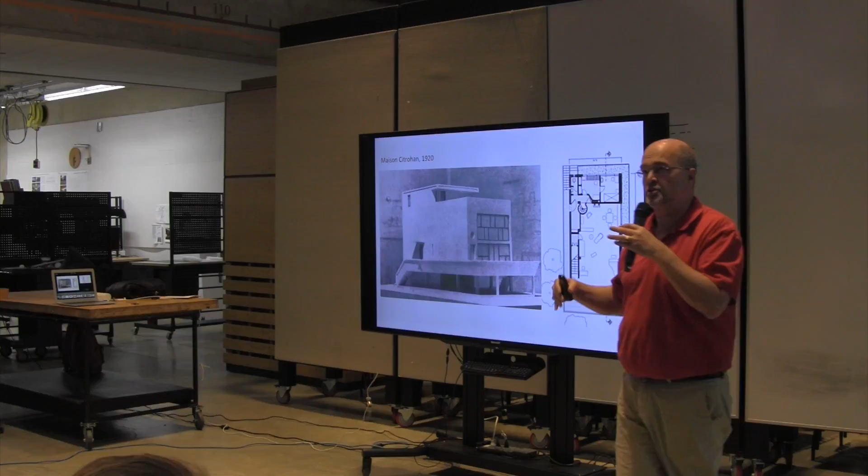The Maison Citrohan is a great example in Le Corbusier's work. It's a recurring project. It begins in 1920, and it has a very simplified diagram of a house: large spaces to occupy, smaller spaces to support that occupation. And it occurs over and over in his oeuvre.

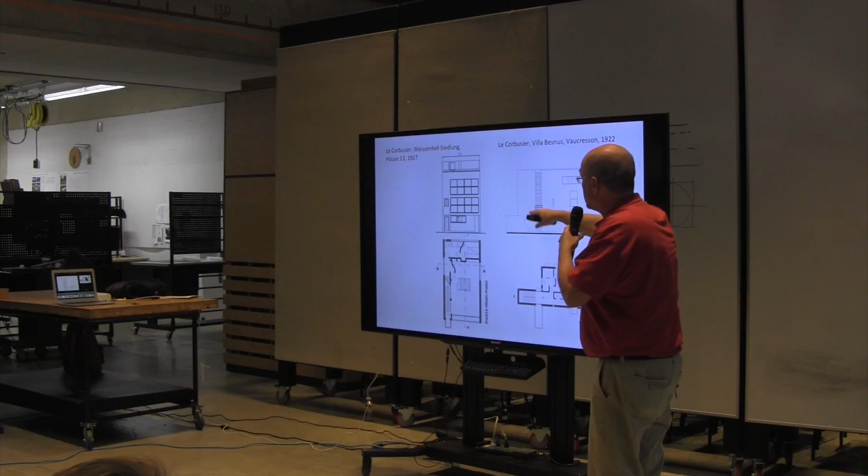You keep seeing this same type reappear and get refined, as in the Weissenhof Siedlung, and as in the villa at Vaucresson. In the Weissenhof Siedlung, you can see the banding of the small band, the big band of occupiable space. You can see it turn 90 degrees.

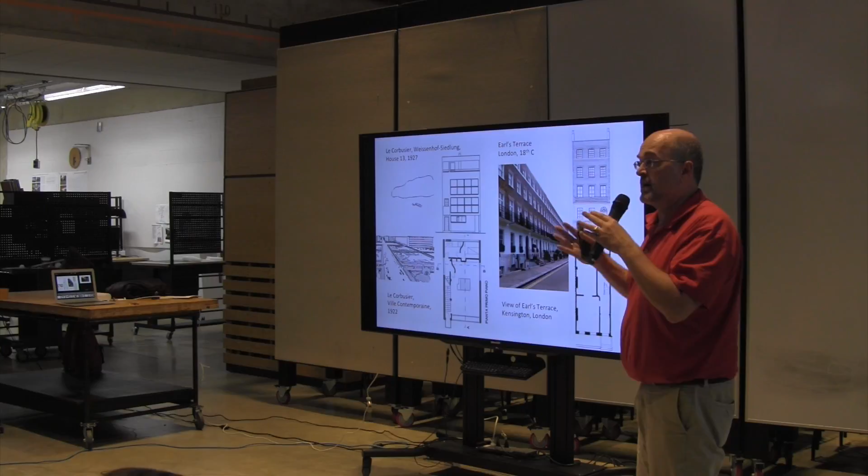He didn't invent this. In fact, he appropriated a typology, the terrace house typology, largely popularized in England—this big bay, little bay expression—and really tuned it up, making it an essential type of his new proposition for the new city that we see on the far side.

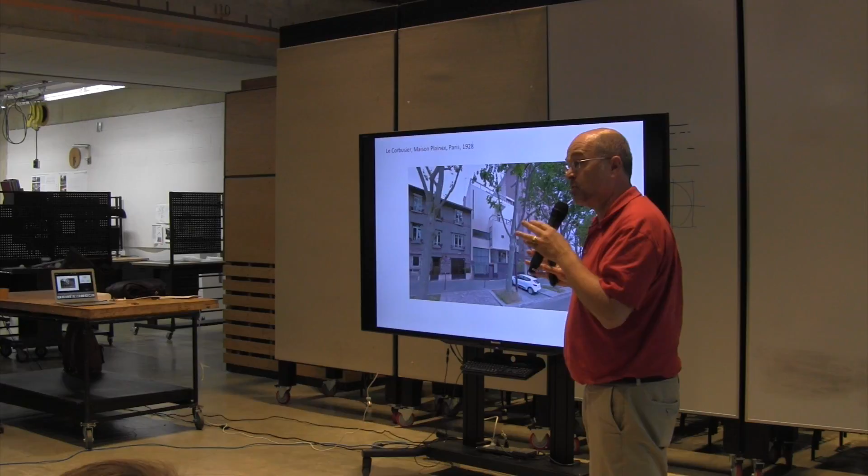But it was also a type, a kind of intermediate type, that Le Corbusier deployed into context in the existing city. It was a type that could exist both as an ideal and as a response to circumstance—a contextual type, a type of modern architecture that could be deployed in the city. It was also a kind of background type.

I feel one of the things we seem to lack as a group of colleagues teaching and learning architecture together is that understanding of typology. I look back to Steven Holl's pamphlet architecture book, looking at the architectural alphabet, fundamentally talking about how the cities we live in are made of iterations of common typologies. Typologies are the bricks and mortar of making cities.

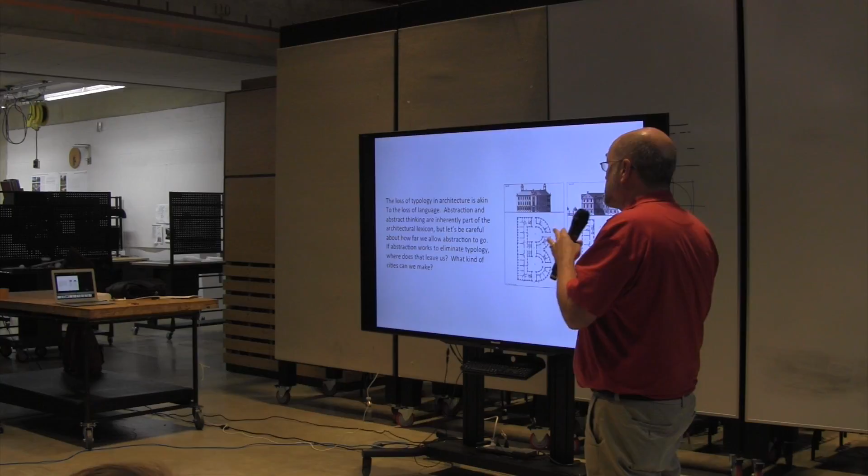Typologies exist within sites, within lots, within blocks, within the city, and there's even a rub against the typology of the architecture against the typology of the urban realm—the street, the interior, the exterior. So I'd challenge everybody: the loss of typology in architecture is akin to the loss of language. Abstraction and abstract thinking are inherently part of our architectural lexicon, but let's be careful about how far we allow abstraction to go. If abstraction works to eliminate typology, where are we? Where can we be?